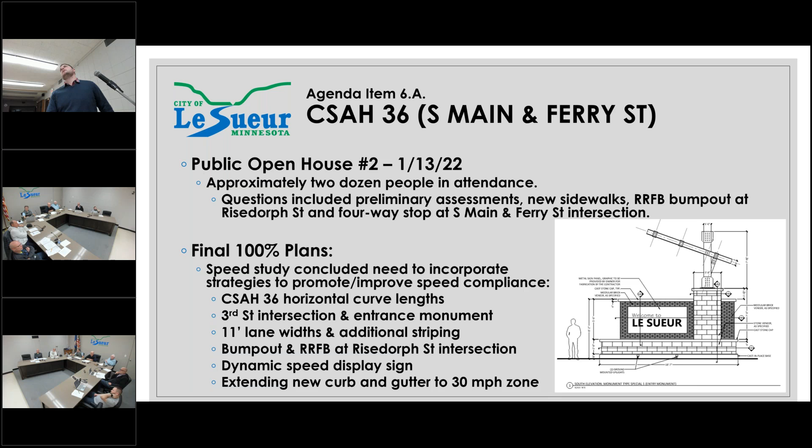The other piece here, just to talk about the final plan - there's been a lot of emphasis and discussion on sidewalks, and just so that everyone's very clear, the final plan includes sidewalks on both sides, all the way to South 3rd Street. That is where they're terminating at that intersection, and we'll have a road crossing there.

As I shared last time, we are going to be required to get a temporary easement for all locations that don't have sidewalk today. So any place there's going to be new sidewalk, which is a portion on both sides, we will be going out and asking for a temporary easement. That's basically a temporary allowance to grade that sidewalk in.

The sidewalk is residing in a permanent right-of-way, though. There's a platted right-of-way on this corridor, and all of the permanent physical concrete is going to be inside the right-of-way. So this is truly a temporary thing to grade the yard and restore it as grass, just to have everything fit and be better maintained.

There is some grade on the south end of town for folks that are familiar, so there's going to be some impact. That easement acquisition is planned to happen in February, so we're going to be very active here in the next coming weeks to try to secure those easements.

There's been some discussion on costs, and just to reiterate and make sure the record's clear, all sidewalk costs are 100% state aid funded. So those are being covered by the county, and as part of their CSAH, county state aid highway, they get funding for improvements to those corridors. That is being covered as part of that.

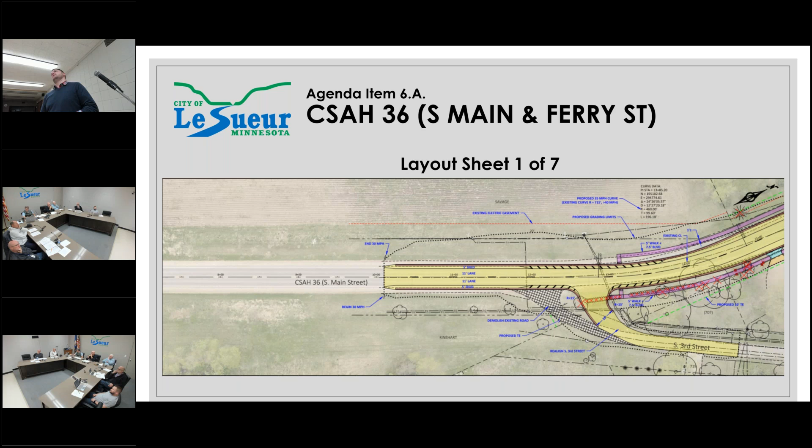So I think really, a good visual here, what we're proposing on the very south end. The middle here is this is all new sidewalk as far as both west and east side. A full reconstruction here of obviously all the roadway surface itself. We are looking at narrowing this corridor, so it's the same width as what we did on 22, Ferry and Elmwood. It's a 40-foot face-to-face. So in this area, it's about a 2-foot narrowing each side.

So it's going to add to the boulevard space, which hopefully helps with some of that sidewalk snow removal and just getting that offset from the road. So we're in every case fully utilizing the right-of-way. The sidewalk's 1 foot off the right-of-way, so we're trying to maximize that non-roadway space to the extent we can.

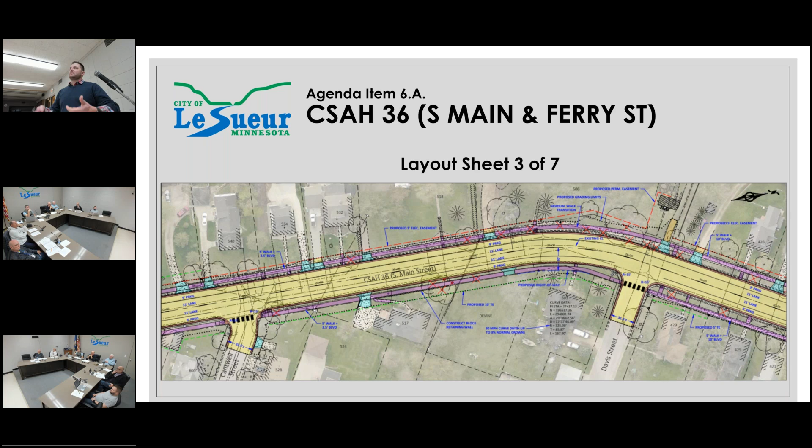And as we work our way up through here, Cantwell, Davis - for folks that are familiar, Davis has a pretty good dip today. We're going to be looking at bringing that road up. It actually fits really well to do that, make gentler that vertical curve, so we're going to take an opportunity to do that. We're raising it about a foot, in the maximum case. So bringing ourselves through, we have a big storm sewer that falls right on the west side there of Davis.

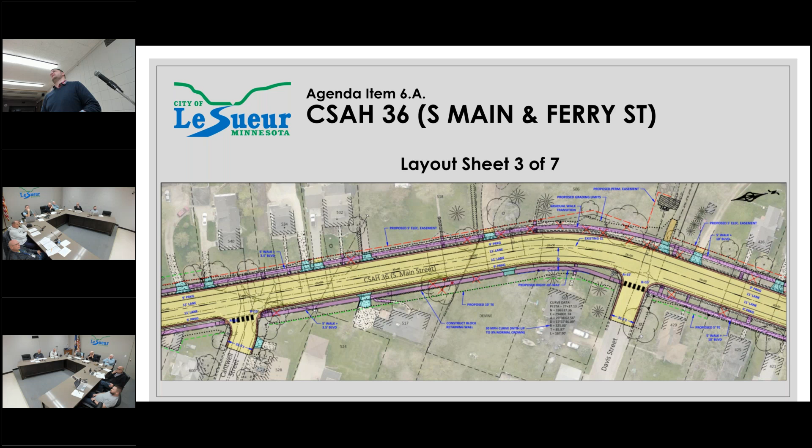And then getting into that true straight north-south section, we get ourselves into Risedorph. And this is where that comment was made, 328 there, noticing that they lost all their on-street parking between their driveway and the bump out. So looking at maybe flipping that to the south side of the intersection and getting that on-street parking. There's really, it's one side or the other. It doesn't make a great deal of difference for the function of the RRFB and the bump out.

We just assumed the north side, but I think the south side is going to work just fine, and it really matches Ferry Street, almost identical to 5th Street there. So I think that's something we can pursue and provide that benefit back.

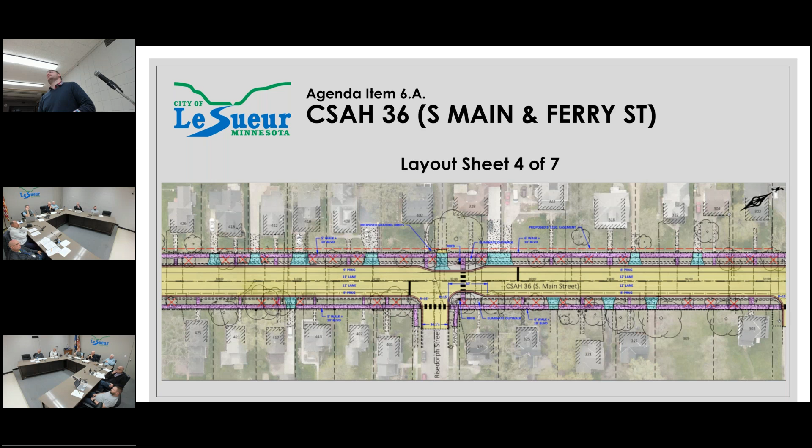Then we find ourselves in that very north end now of Main Street, building face to building face. I shared last time, sizable street narrowing here, about 3 feet each side, 4 feet each side. So it's going to feel quite a bit different, and that really gives us an opportunity to give some of the boulevard space back, pull that curb away from the building.

And then I shared last time, we're looking at getting zero height entry on that east side businesses. So that's really valuable to get that extra space to raise that sidewalk up so we can give those folks a ramp in and eliminate all the steps there. There's five entrances off of Main Street that have steps today. So I think we're looking at eliminating all those, and the road narrowing is a huge, really a difference maker in being able to do that.

And then we find ourselves on Ferry itself, literally. So there's that one block between South Main and the parking lot. That's the non-participating, local leg that we're reconstructing as this. It makes a great deal of sense. The storm sewer goes underneath the railroad tracks to the river here, so it made a lot of sense to go down this block and tie it all together. And then we'll obviously tie in the parking lot next year too, so that will be all newly improved.

Going then further east of Main Street, we are narrowing this section as well, and being able to pull that curb away from the building face, add to the boulevard. We're able to improve some utilities to the library. The services are in really poor shape, so that's a value here at Ferry Street to be able to do that. And then working our way up past City Hall.

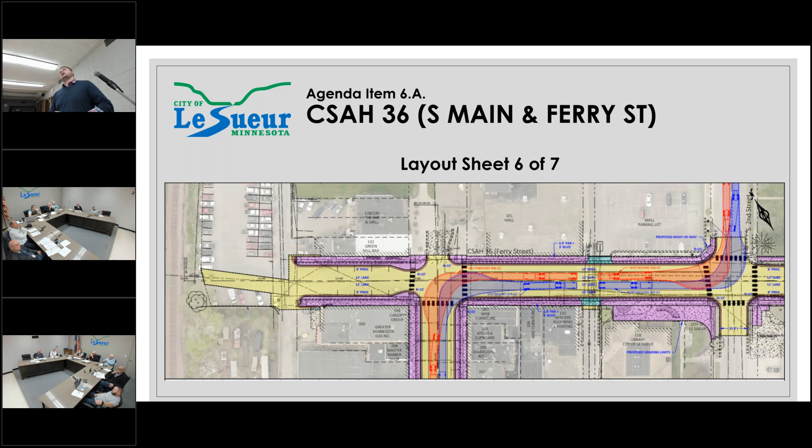There's no storm sewer in Ferry today, so we've got some awkwardness, or no sanitary as far as how some services are being fed. So we're extending sanitary up Ferry, looking at storm sewer, and then a full rebuild of the retaining walls. So Ferry on this 2-block stretch is going to very much mimic Bridge Street - they're almost identical in grade and really positioned.

And then we connect into 4th Street. We stay out of 4th Street, so that would be available all during the project. We rebuilt that with 22, and that completes the official 36 corridor. Then that's where the county road number changes.

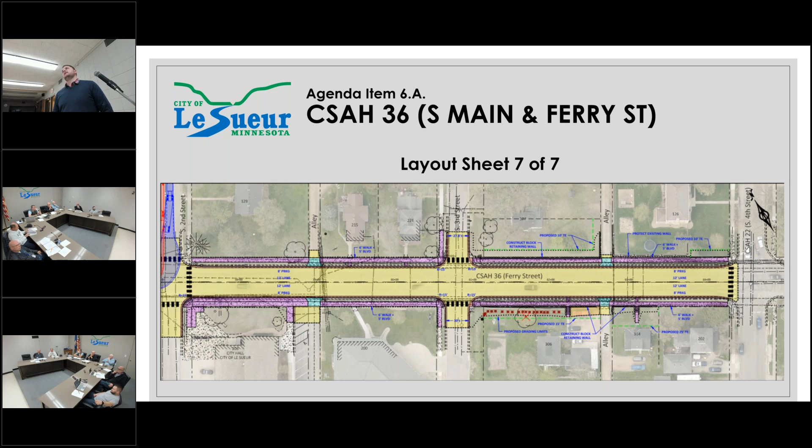So really where we're at right now is we have this 100% plan. That's what we submitted to MnDOT, and we're waiting for their approval and signature at the bottom right, which is the state aid approval from MnDOT. The district state aid engineer signs that. We've got approval from the county board already, so we're just waiting for that.

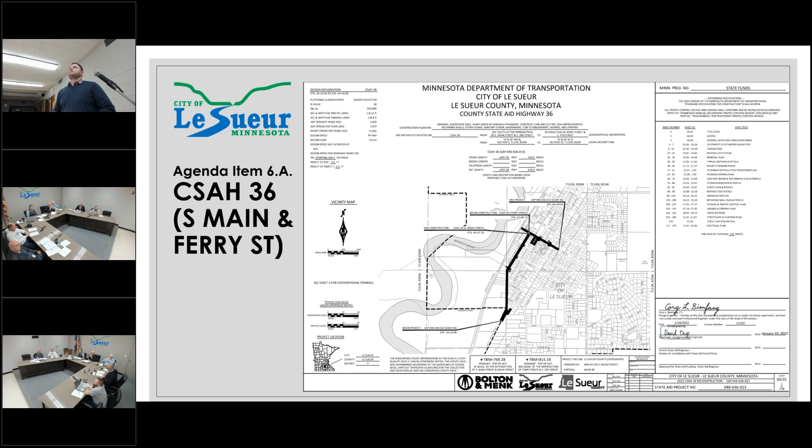That allows us to officially go out for bids. Definitely open for any questions, but the recommendation is to ask for acceptance of our resolution. I did have a revised one. Jasper noted there was a county engineers conference, and I wasn't able to confirm with Dave the bid opening date. He had a condition that has to move it one day based on his policy, so we slipped that from the 24th to the 25th. It's acceptance of the final plans and specs, contingent on MnDOT approval, of course making changes they require as part of the review, and that allowance to advertise to get that ad in the paper, which we're legally required to do. So that's really the ask of tonight. But first, I'd be happy to address any questions or concerns.

Mr. Mayor, council, anybody with any questions? I have a quick one. I have the resolution in front of me that was in our packet. Are we to change the date right in the middle, from 3 p.m. on February 24th to the 25th? Correct. Okay, thank you.

One other question, maybe you covered that and I may have missed it, but what's the anticipation of the length of this project, starting when and ending when? Yeah, it's a good question. Right now the start date is always to be determined to an extent, because we just don't know when weather is going to turn and spring is going to be here and winter is over. I would say it's very likely we'll be in construction by May, around the 1st of May. We'll certainly take advantage of any time in April.